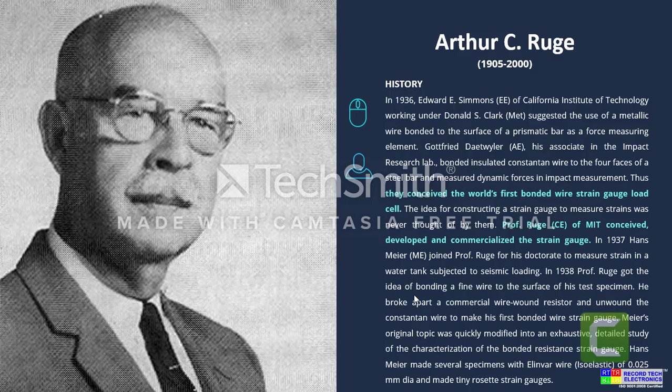So if I go back to history, an idea which was conceived in 1936 was actually converted into a commercialized strain gauge in 1937 by Arthur C. Ruge, and you can actually Google him and study about him, how he eventually came up with strain gauges.

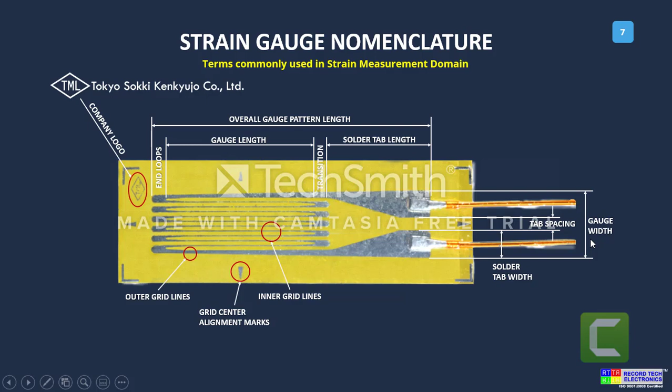Now if we have a pre-wired gauge, then there will be these enameled lead wires connected to a cable, and the cable can be as per the choice of the user. Then the practitioner's approach: the things which we practice have a theory behind them, and this is just a brief recap of our 11th and 12th standard physics, which we have all studied.

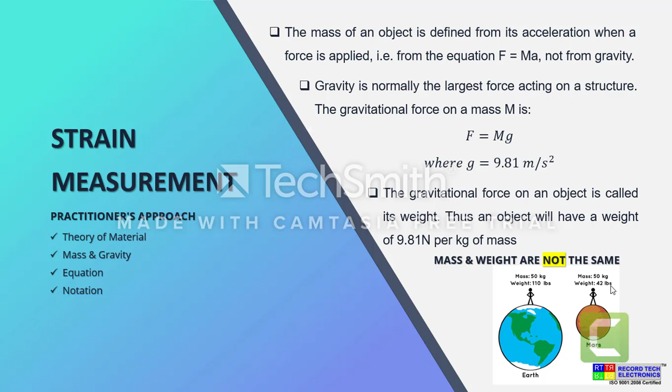F is equal to mg, where g is 9.81 meters per second squared, and I think most of us would remember the explanation in a lot of physics books, that a man weighing 50 kg, about 110 lbs, would actually weigh 42 lbs on Mars. This used to be there in the illustration. Very important thing, so we should always remember these things.

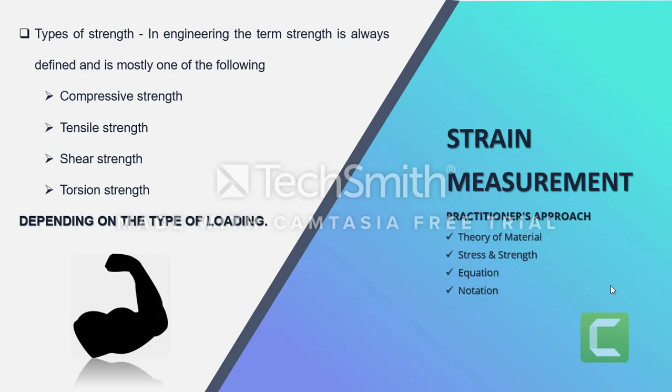Then, what are the types of strength? In engineering, the term strength is always defined and is mostly one of the following: compressive strength, tensile strength, shear strength, and torsion. And these are all dependent on the type of loading. So let me give you a brief overview of all these things. So, by formula, stress is what? Load by area. That's the definition, and that's the formula.

So, stress is a measure of internal resistance in a material to an external applied load, for direct compressive or tensile. So if somebody is bothered by these two words, compressive and tensile, in a simple way, if you take a scale and you try to press it, if it starts bending inwards, then it is almost like compressive. When your both hands come towards each other, it's compressive.

When they go outwards, that is tensile. So this was in a horizontal plane. In vertical, with anything hanging, again with both hands, one going up and one going down, that's tensile. Both hands coming together is compressive.

Shear. In shear stress, the symbol tau is a measure of internal resistance of a material to an externally applied shear load. Shear stress is defined as load upon area of resisting shear.

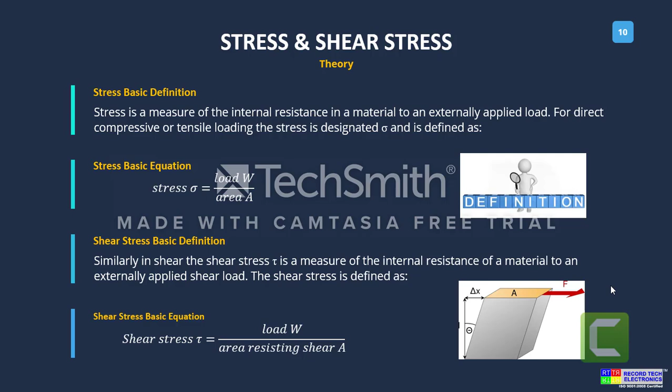The picture is self-explanatory. The force is applied at one end, and this is a shear force. These three pictures give a clear idea: when the hands are going outwards, it breaks in between because of tensional force. When coming towards each other, it's compression. When they are rubbing against each other, going in opposite directions, that is shear.

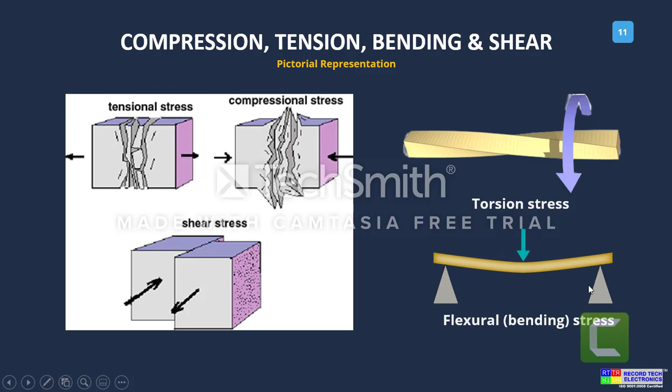This is a typical theory of ultimate strength, so the formula says it all: safety factor is equal to stress at failure upon stress when loaded, so ultimate stress upon permissible stress.

Now let's start defining strain. What is strain? Strain, as I said, is a dimensionless quantity, increase in length by original length. Shear strain is shear displacement x divided by width L.

I'm not reading the specific definitions, it's pretty explanatory. Now, elastic and plastic deformation.

I will take the scale example. If I start bending a plastic scale, the word plastic is from the material plastic. If I start bending it to a point and release, it would come back and attain its original position. That means it's elastic.

We have elastomers and different kinds of rubber bands which are elastic. You stretch them, release, and they come back to their original shape. But after a point, usually called the yield point, it would not come back to the original position, and that is called deformation. After another point, the rupture point, it will actually start breaking.

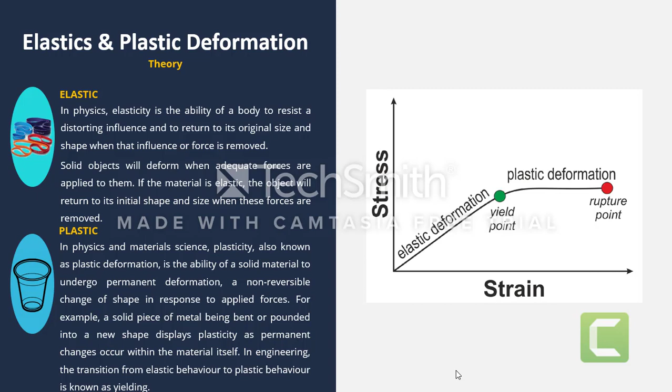As in physics, elasticity is the ability of a body to resist a distorting influence and to return to its original size and shape when the influence or force is removed. Whereas for plastic, it would be the opposite.

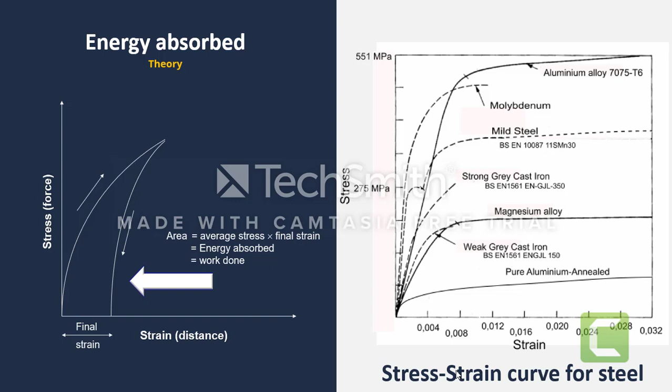This is a typical curve for steel and how energy is absorbed, the strain versus stress curve. Now let us start talking about measurement. How do we measure stresses and strains?

The general strain measurement procedure is simple. We determine what is to be measured, measurement purpose, requirement, accuracy, etc. Survey the measurement condition of the material, shape, dimension, temperature, atmosphere, because for different temperatures we need different kinds of gauges. Select the strain gauges, adhesive, lead wires, coating material — all of that has to be decided. And plan out the installation procedure.

If you have an installation procedure, it is good because you need some drawing on how to do it. Then install the strain gauge, measure the strain, process the data, check the validity of data, remove the strain gauge and clean up. These are just the basics of the general procedure for measurement.

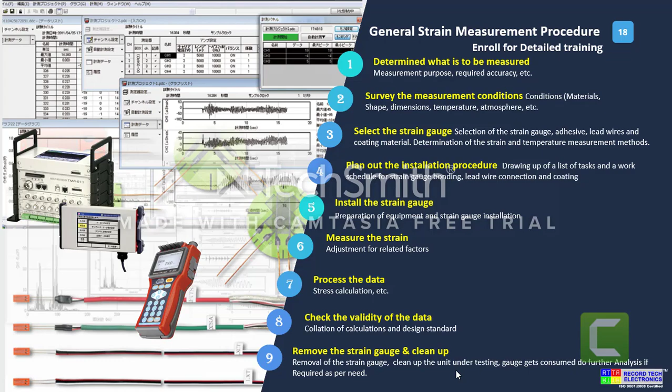Now it is very important for an individual to select the correct strain gauge, and when selecting, I have identified four limitation sections which you should always consider.

When you want to use a heat curing adhesive but heating the test specimen is problematic, this is one limitation you should always take care of.

When you want to use a weldable strain gauge but the test specimen material is difficult to weld. Third, when the amount of coating required to waterproof the gauge causes structural problems with gauge functioning. And fourth, any other constraint not covered in the first three would fall into limitation four.

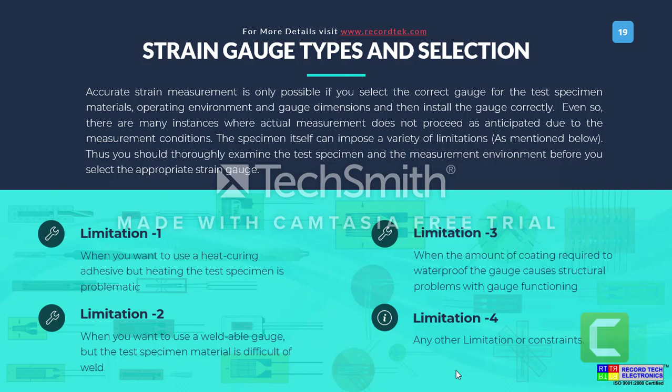The results you measure will be defined by how you have selected the gauge, how you have installed it, and the accuracy of the system. So every building block in the measurement would contribute to the authenticity of the data which you acquire.

Now, types of strain gauges. If I have to classify, we can say testing temperature is one type of criteria: low temperature, normal, high, super high. Then usage: large elongation, stress concentration, residual stress, bolt axial torque, etc. Then what is the material you have to use?

That is metal, concrete, wood, plastic, composite materials, glass. So you have to decide on what is the material. When I say metal, it can be MS or SS, or it can be aluminum. Then there are transducer-specific gauges, because when you're making a load cell, you need strain gauges which are designed for a transducer.

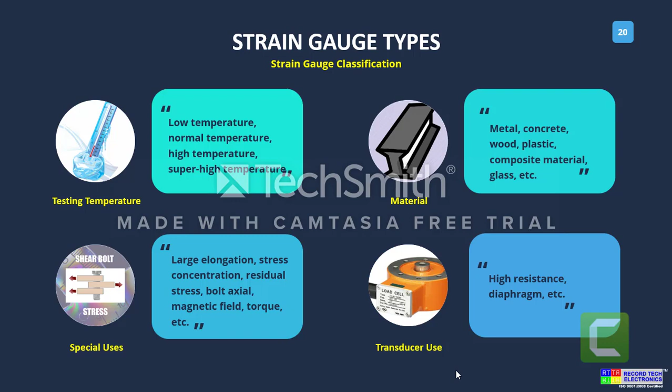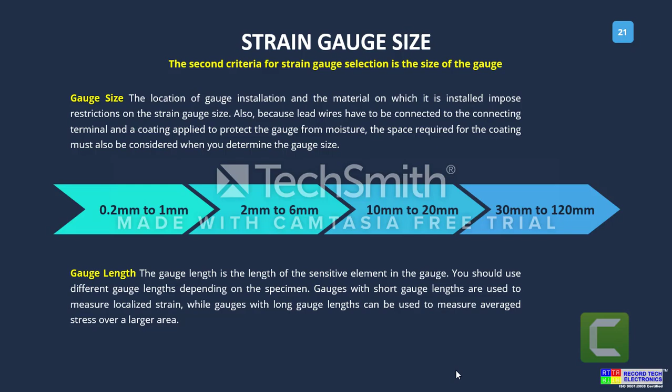Now, for stress concentration measurement, we have 0.2 to 1, for wood, mortar, FRP materials 10 to 20. For metals usually it is 2 to 6, and for concrete it is 30 to 120. But you should always check with us what exactly is your specimen and what you want to do, and we will let you know the right kind of gauge.

We even have some narrow type gauges which are marked with FLK, so they are narrower in width.

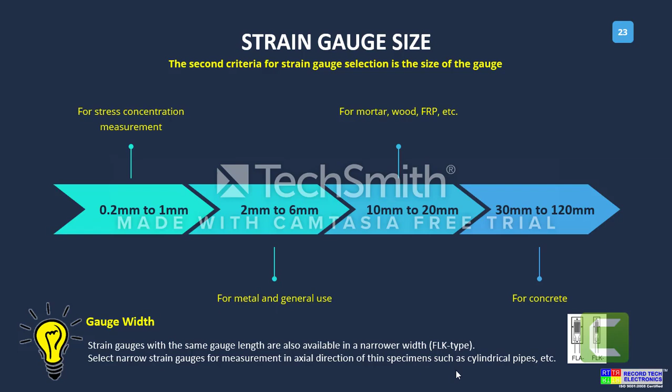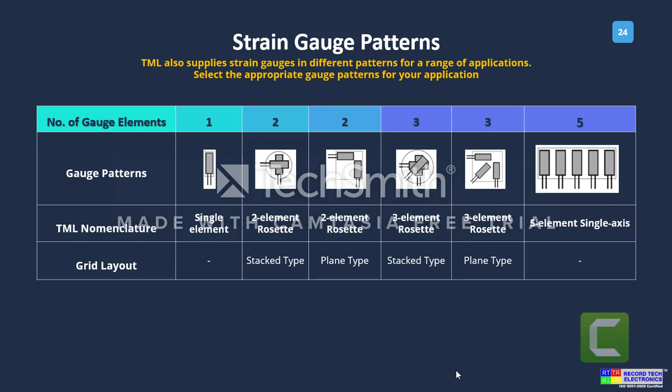Now, gauge pattern. Gauge pattern is important because we don't know the principal axis of stresses or strain. So we have uniaxial, two element rosette (one stacked, one plane type), then three element, stacked and plane, and then five or multiple element gauges. You have to decide on what pattern you should choose. There are multiple more patterns of strain gauges for different applications.

Now, temperature is very important because temperature variation would give you different results, so you need to select a gauge which is compensated for the temperature. There are strain gauges for cryogenic range, from minus 269 degrees to room temperature.

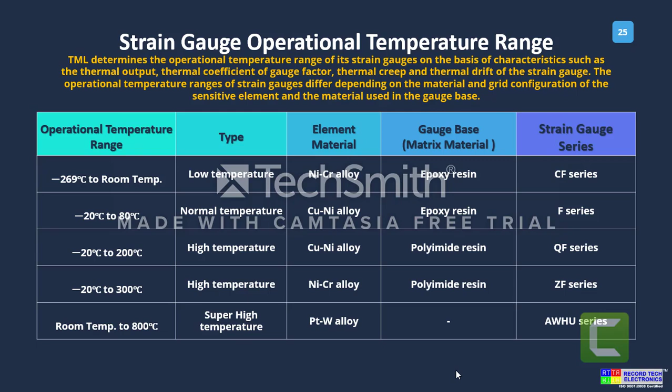We have a standard range which is minus 20 to 80, then a high temperature range up to minus 20 to 200, and up to 300, and then a super high category which is up to 800 degrees Celsius.

So the criteria is testing temperature: the item selected is gauge series, and the method is to select a gauge series capable of functioning at the testing temperature. For test specimen material, select a self temperature compensated strain gauge appropriate for the specimen material.

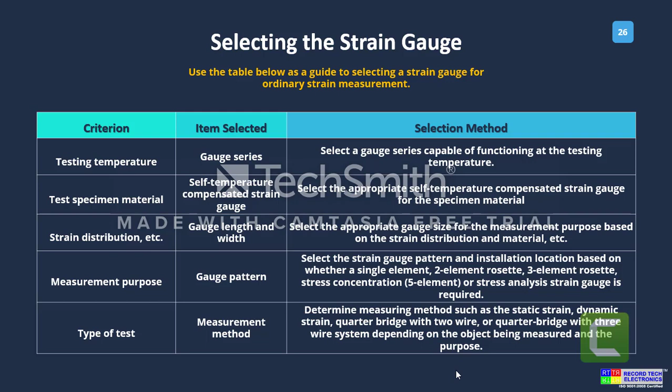This is a basic slide - use this table as a guide to select a strain gauge for ordinary strain measurement. Now, basic strain gauge installation procedure step by step: surface treatment, strain gauge installation, adhesive curing, strain gauge installation check, lead wire connection, coating, and final check. These are the steps which are done.

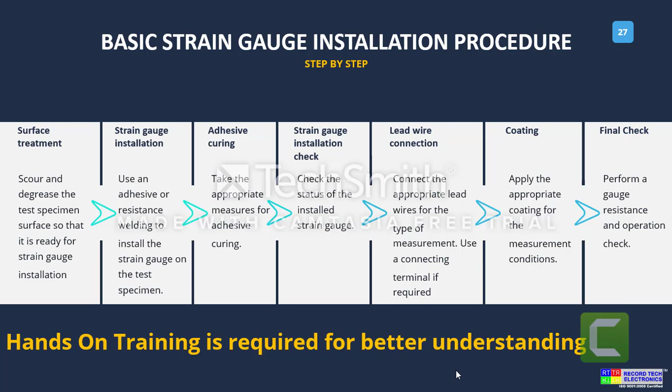Basically, I've covered most of the topics in an overview manner. I understand this is a brief course or intro on how a strain gauge is selected and how it will be installed. More information you can find on other videos, or you can write back to us and we can let you know how to do this installation.